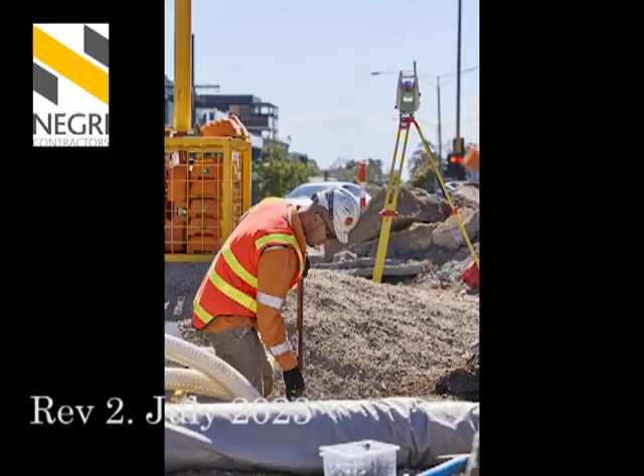I understand we've all done lots of inductions, but it's important that you listen because work processes change, and this might save your fingers, save an eye, save your job, or even save your life. So it goes for about 20 minutes and I encourage you to pay attention.

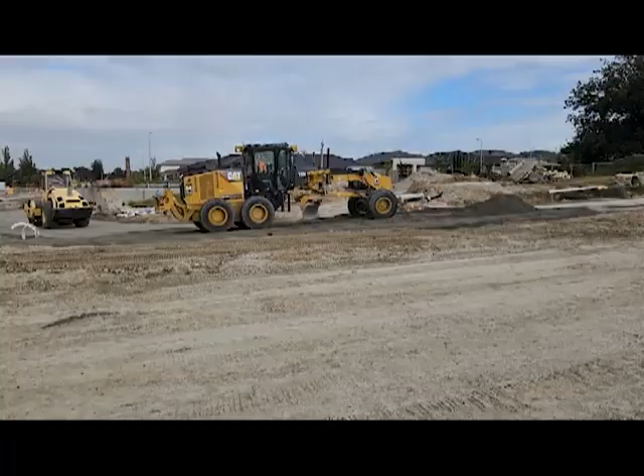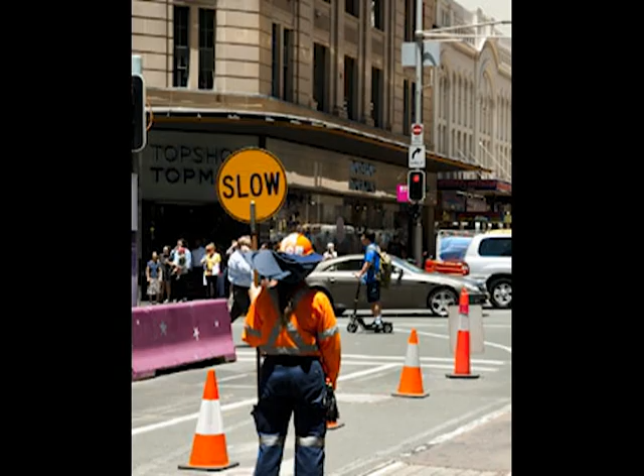So what's the reasoning behind delivering this induction? Negri offers an induction for several reasons. It's fundamentally important that everybody working on site understands what the safety, quality and environmental requirements are on the project they are working on, as well as the workplace expectations and what workplace behaviours are deemed acceptable. Those benchmarks include how we undertake all work safely, how we deliver work to a quality, and how we work collectively to deliver a project to a client's specifications.

This induction will outline a number of non-negotiable workplace conditions which all workers are required to apply at all times on any Negri project, in how they treat their fellow workers, apply safety to all tasks, and deliver work to an acceptable quality and on time.

The objectives are for workers to demonstrate an understanding of their workplace safety responsibilities and to work within the requirements that may present while on site. Workers also have to successfully answer a very short questionnaire at the end of this presentation to show that you understand your accountabilities and responsibilities, and finally to produce evidence on the devices having completed the induction when requested on site. Negri work under several key pieces of legislation, the main ones being the Victorian Occupational Health and Safety Act of 2004.

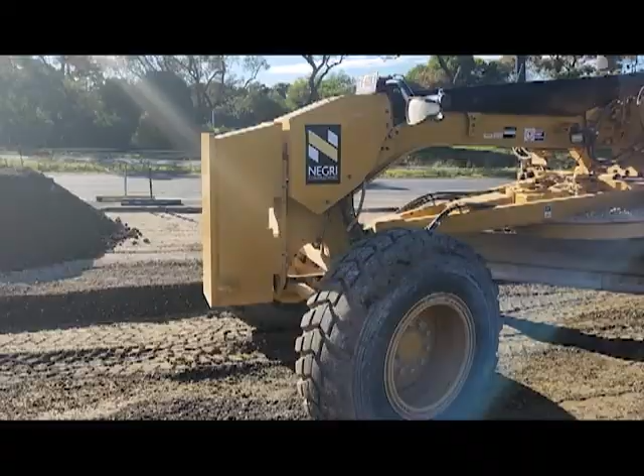And the Victorian Occupational Health and Safety Regulations 2017. There are a number of other acts and regulations, as well as compliance and guidance notes, codes of practice and Australian standards that Negri and the project work under. All legislation and compliance codes are available on site on request.

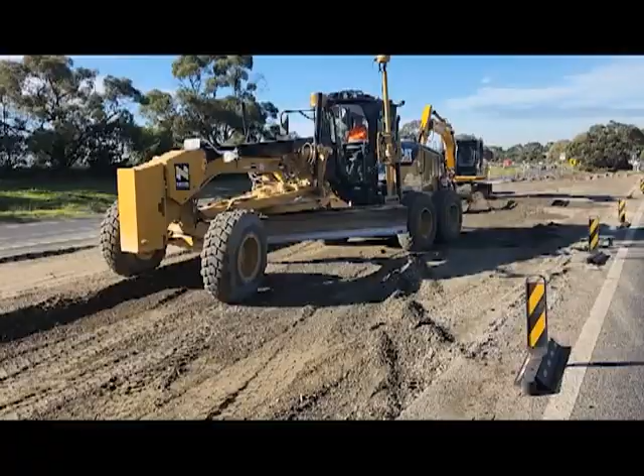A key element within the Victorian Occupational Health and Safety Act of 2004 is the notion of duty of care. This means that as an employer we have an obligation to our workers to provide a workplace that is free from any reasonably foreseeable risks.

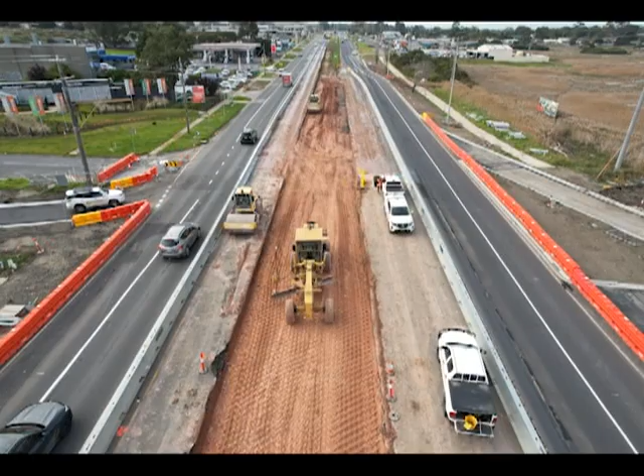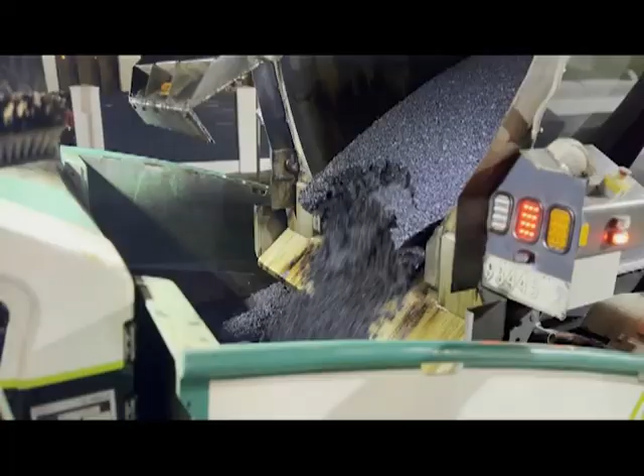Negri must meet our duty of care by providing, amongst other things, safe systems of work, ensuring that all plant and equipment is safe to use, ensuring that all reasonably foreseeable risks are identified, assessed and controlled, and providing training, instruction and supervision to ensure that all work being done can be done so in a safe manner. This induction forms part of that training requirement.

Under the Occupational Health and Safety Act, workers also have duty of care obligations. These are predominantly that you will undertake all reasonable actions to ensure your own safety as well as the safety of other workers, only work within your competencies and not do anything you're not trained or experienced in doing, follow all reasonable instructions as issued by Negri, and wear and use all PPE as intended and as directed.

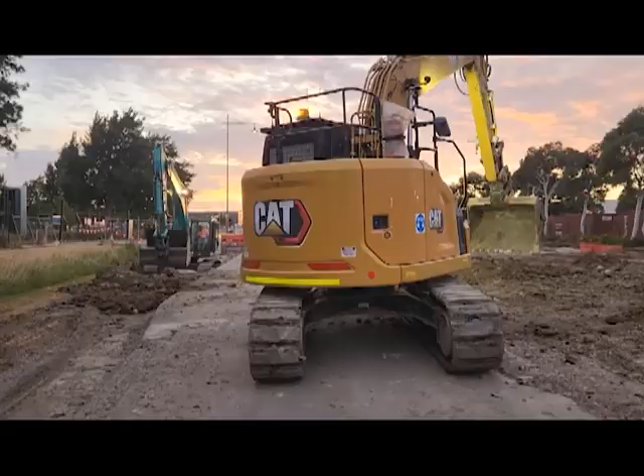If you feel what we ask of you during this induction you're unable to comply with, then please do the right thing and don't come to work with us, because we won't lessen our safety requirements for anyone.

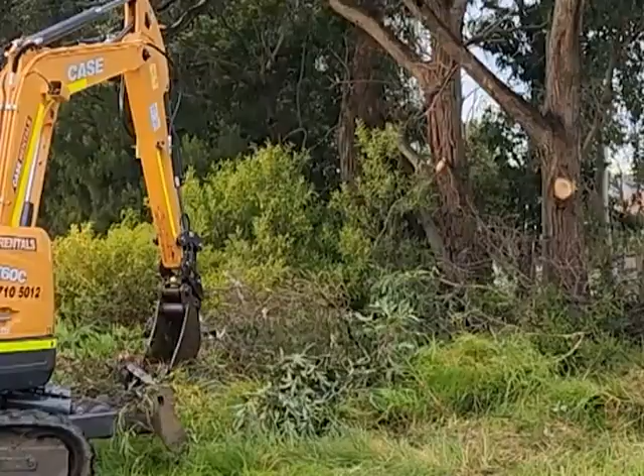So who is Negri? Negri is a proud civil construction company that is approaching 100 years of delivering construction projects in and around Melbourne. Negri started in 1928, and even though there's been a few changes, the core of the business remains the same. We'd like to believe that the longevity of the business is due to our reputation with clients, completing projects safely and on time, to a budget and to a very high quality standard that our clients are proud of what we deliver for them.

But Negri is more than just a business name. Negri is made up from all the people who turn up and work for the business in any capacity every day. And Negri is as successful as the least safe person on a site.

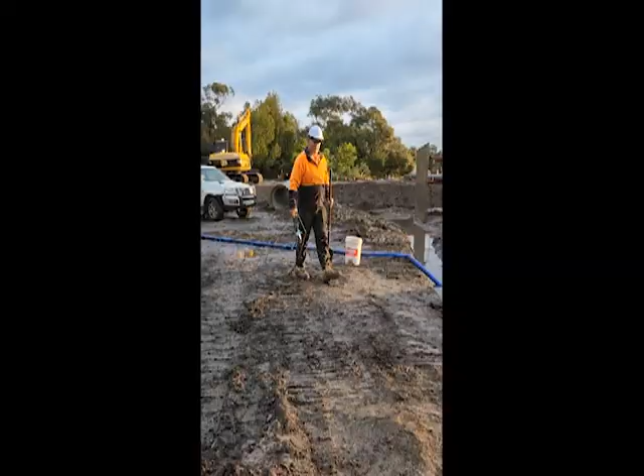Negri will only be as successful as the person working on site who cares the least about the quality of work they deliver.

Negri have a lot of workplace policies around safety, environmental, quality, bullying, fair work, issue resolution and a few others. These are displayed in the crib rooms at the project you're working at, and these policies reinforce those standards and expectations we're about to cover.

We're going to spend the next few minutes looking at some of the high risk work that affects most Negri projects.

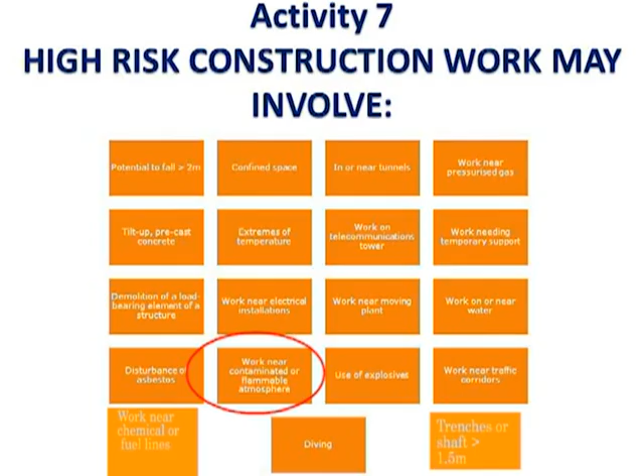The common high-risk construction work activities that generally happen on Negri sites involve the potential to fall greater than 2 metres, trenches or shafts deeper than 1.5 metres, confined spaces, work near pressurised gas, works near electrical installations, work near moving plant, the disturbance of asbestos, work near contaminated or flammable atmospheres, especially regarding silica dust, and work near active traffic corridors including rail and roads.

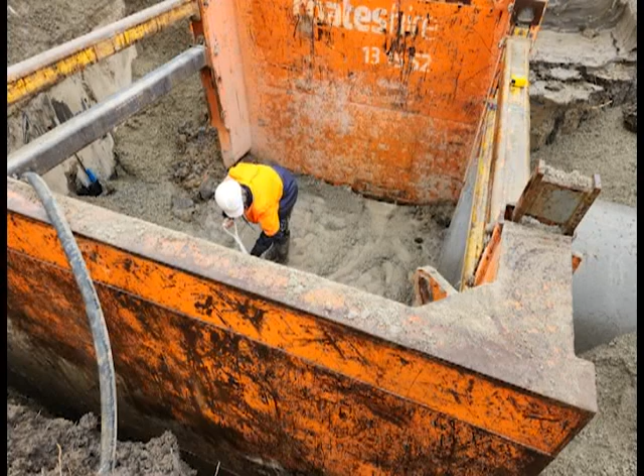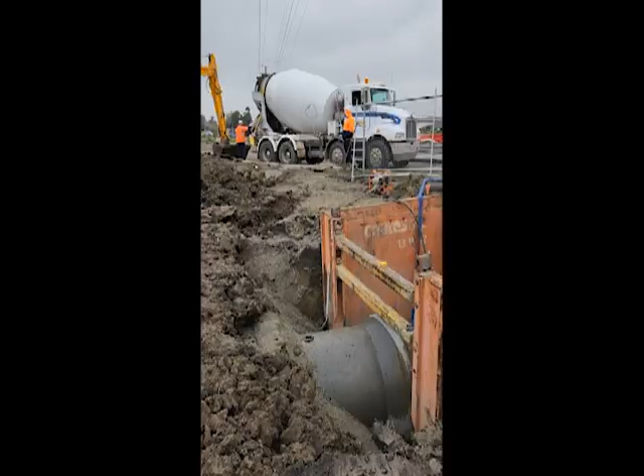It's important to realise that all high-risk work activities on a construction site must have a safe work method statement prepared for that task to work under. Safe work method statements must only capture any of the high-risk works as we've defined, and must then nominate what specific controls are to be applied to manage or mitigate the risks associated with those high risks under that construction work.

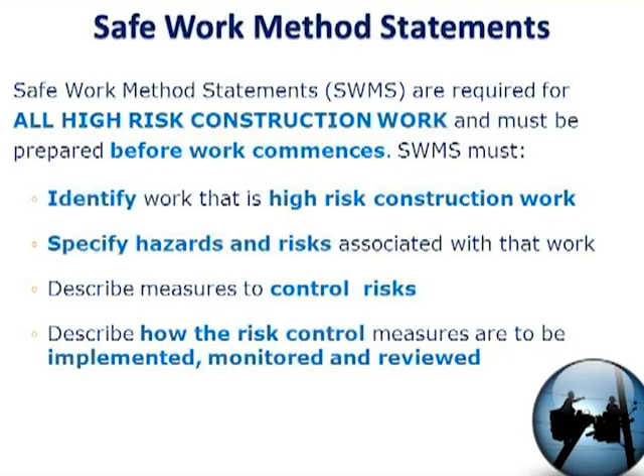SWMS must also determine who specifically is deemed responsible for ensuring that the nominated controls are in place prior to works commencing. For the SWMS to remain compliant, no other hazards or risks that are not defined as high-risk construction work are to be captured on the SWMS document.

Works should not commence until a safe work method statement has been developed and reviewed. For all other hazards and risks, these need to be managed through other means. Workers undertaking tasks under a SWMS must have an opportunity to read and review that SWMS prior to the works. All SWMS must be reviewed monthly as a minimum and re-signed, including all subcontractor SWMS.

Let's spend some time looking at some of the known high-risk work activities that we routinely are exposed to on our projects, and the steps we need to take to sufficiently manage the risks they bring.

By design, Negri is a civil construction company. A significant majority of our works involves construction of either new roads or replacing and resurfacing existing roads. As a result, we constantly find ourselves interacting with members of the public in vehicles as they transit through and around our work sites. The risks around having this shared workspace with members of the public that we do not directly control or manage introduces a number of critical risks in our workplace that can be difficult to apply.

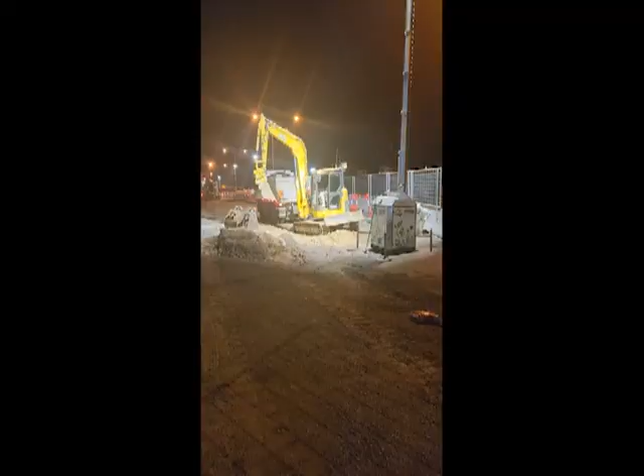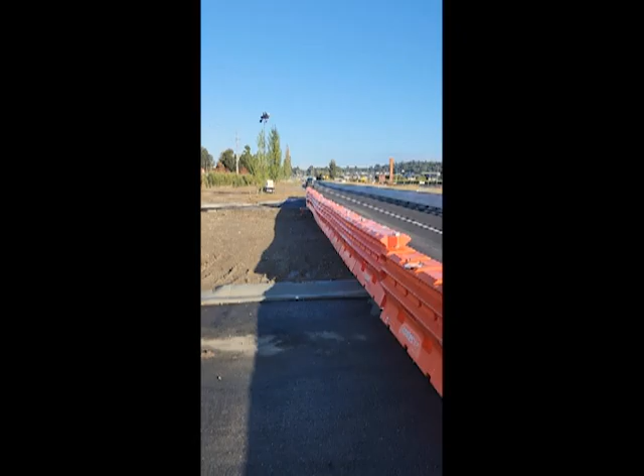To try and manage those risks, we look to separate or segregate our workplace from these members of public wherever practicable, using a number of delineators or barriers. From TL4 or TL3 type steel and concrete barriers to TL2 type water barriers, or in some instances, bollards and stop-go traffic controllers in parallel with truck-mounted attenuators. Each workplace risk will need to be managed by using the most practicable control.

When working within these workspaces, workers must always maintain a high degree of vigilance around what members of the public may be doing.

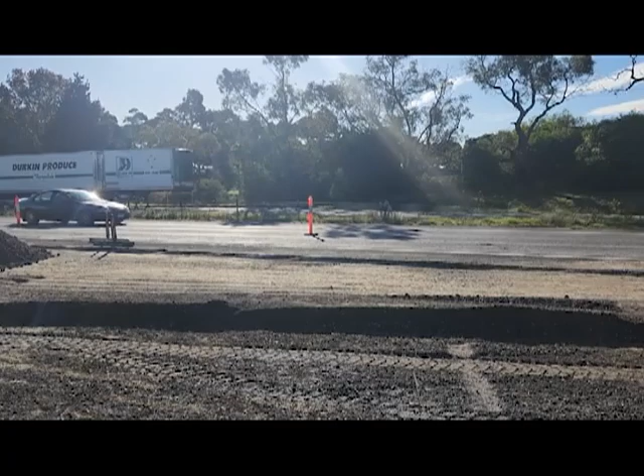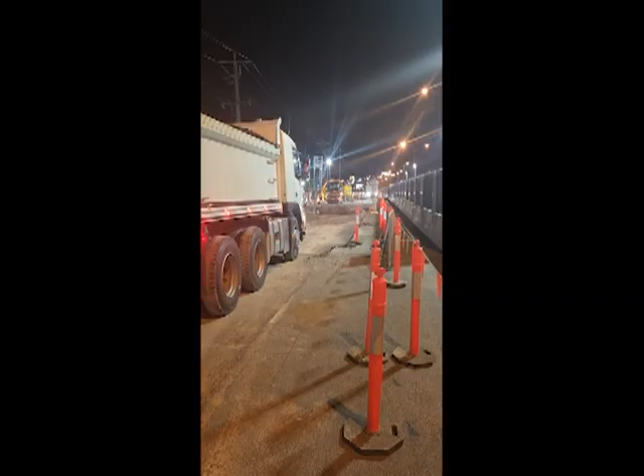Where the barriers are installed, workers are not to work within any defined deflection zones. Deflection zones are dictated by the speed of the traffic passing the barriers and the types of barriers in use. Deflection zones will be discussed in pre-starts and should be marked when on site. No tools or materials are permitted to be placed or stored inside this deflection area, and nothing is to be leant up against the barriers.

Under no circumstances are workers permitted to ever jump over traffic barriers. Proper pedestrian access points to allow workers to safely cross any active traffic lanes are to be designated within the work zones, and it is that point only where workers will cross roads to enter the work site.

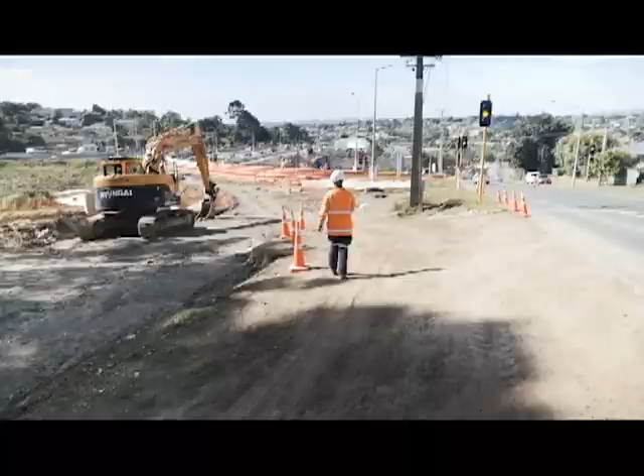On some occasions, our work involves entering into confined spaces, and there are a number of requirements around what needs to be done prior to that work being attempted.

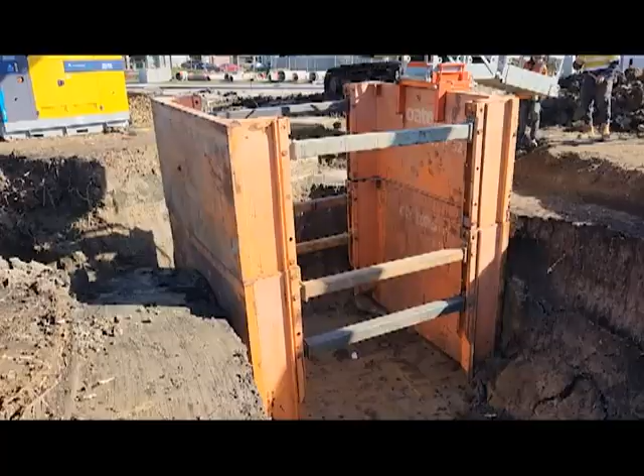On all projects, Negri will ensure that all confined spaces are identified early, as that will trigger certain safety requirements for works to be done safely, such as all workers entering the confined space must be able to demonstrate they are familiar with the hazards and risks that working in that confined space may introduce.

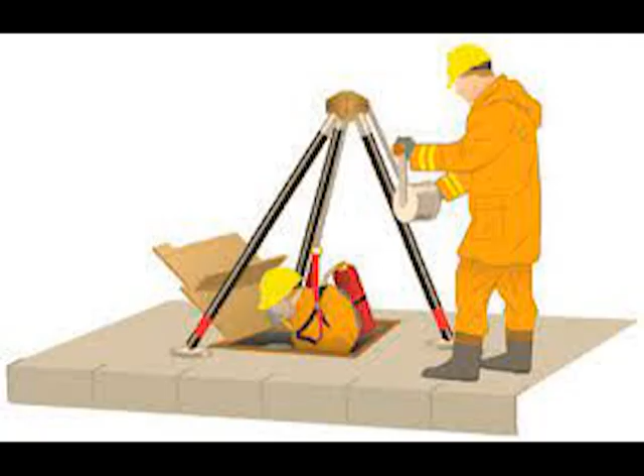There must be a permit to work system in place where all workers entering that confined space must sign in and out of, and there must be a dedicated confined space sentry who is able to maintain continuous communication with the people working in the confined space and who oversees the safety of those people.

No worker is to be requested or is to work in a confined space where those conditions are not met, and where there is any doubt, workers are to follow the Negri issue resolution procedure before that work is started.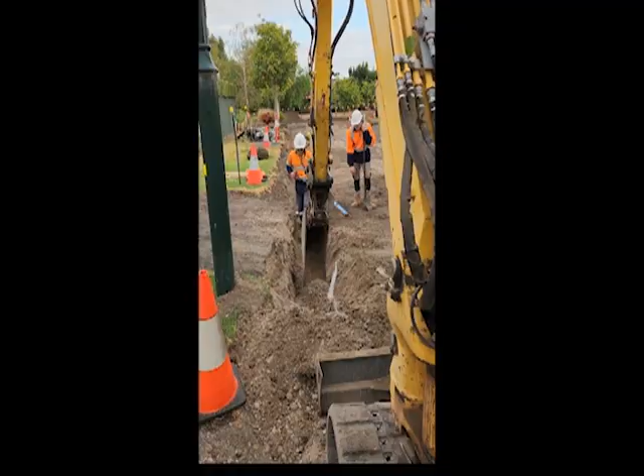Possibly one of the biggest risks for any civil construction company, especially during excavation activities, is contacting an underground service that is either unknown, hidden, or missed during any utility mapping. These can include high pressure gas lines, high voltage electrical lines, drainage and sewage pipes, and a number of other services people have buried over time.

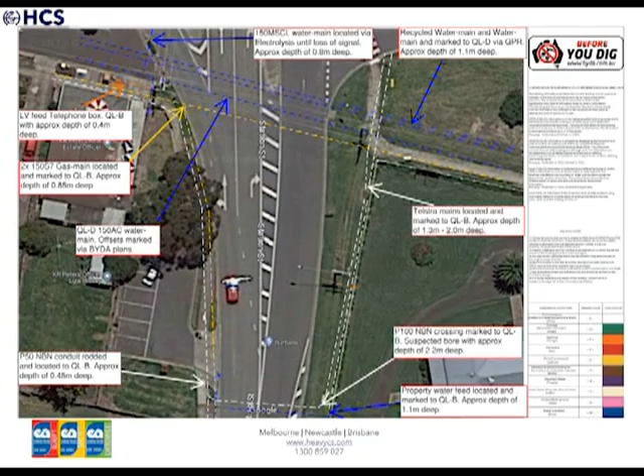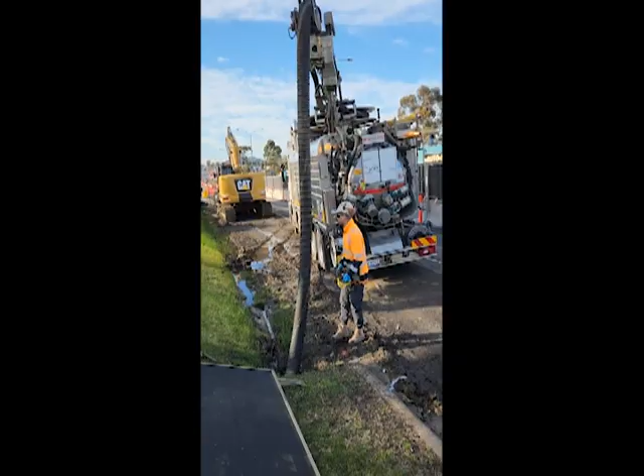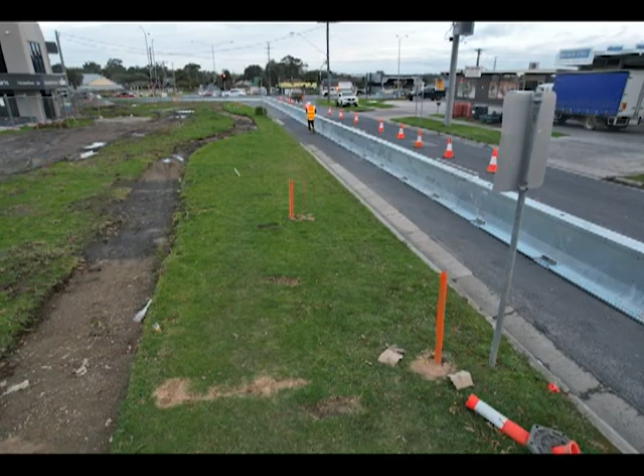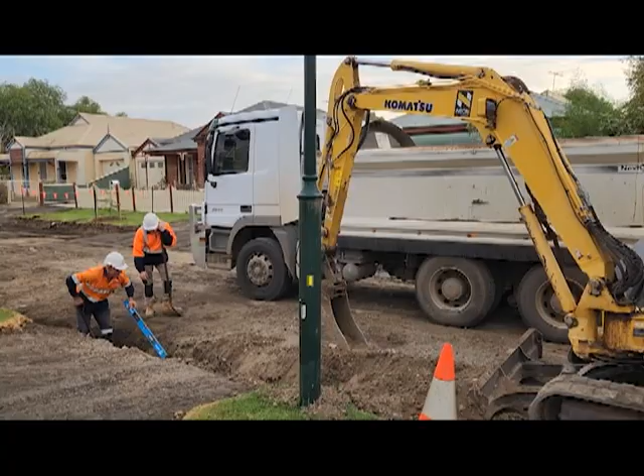On all projects, Negri will review all dial before you dig documents, as well as liaise with utility owners, and then physically locate any services that run into, through, or out of our working areas, using either non-destructive digging or service sweeping. The other risk for workers and plant is contacting overhead services, mainly communications cables or electrical wires. To best mitigate those risks, safety controls will be put in place, from proximity warning devices through to ticketed and experienced spotters being used whenever Negri is digging, or wherever we are using plant or equipment that can access inside overhead no-go zones, or where there is any risk that both may be present.

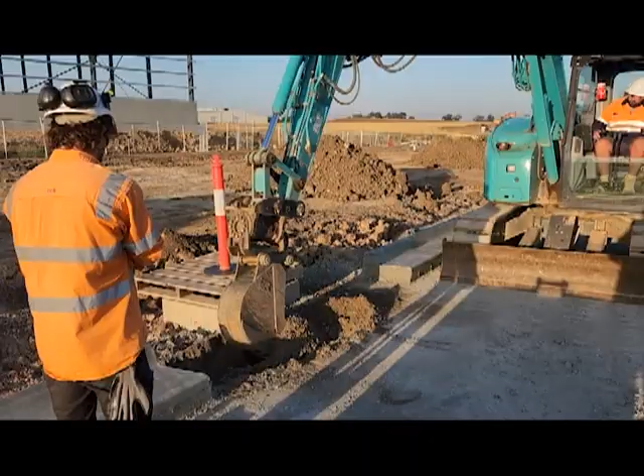Nearly every Negri project encounters the need to trench to a depth deeper than 1.5 metres. Trenches that deep introduce risks around potential for collapse, the potential for oxygen deficiency, and the potential for flammable vapours and gases that are heavier than air to accumulate.

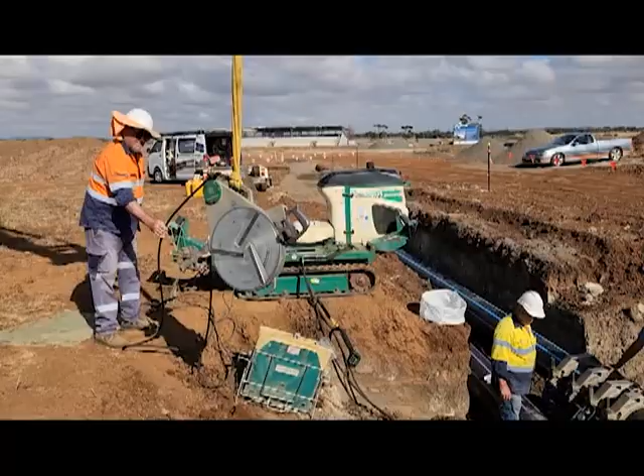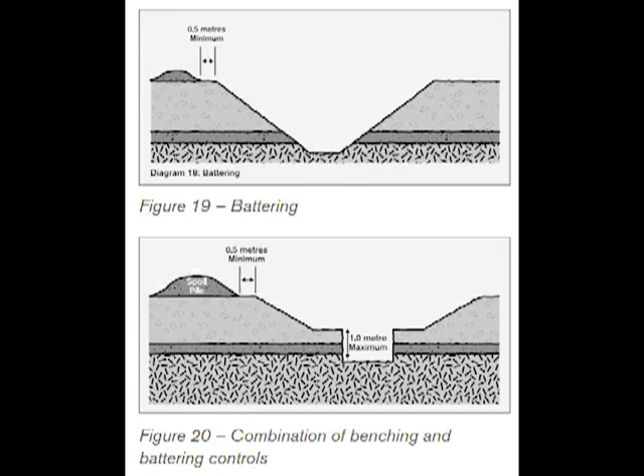To manage those risks, any excavation with a vertical wall greater than 1 metre in height must either be benched, be battered, have a geotechnical engineer confirm that the trench walls are able to sustain themselves without collapsing and that it's an acceptable risk, or shields and soldiers are to be used to secure all trench walls. The Negri project team will constantly reassess the works and put in place suitable controls where we are working in trenches deeper than 1 metre.

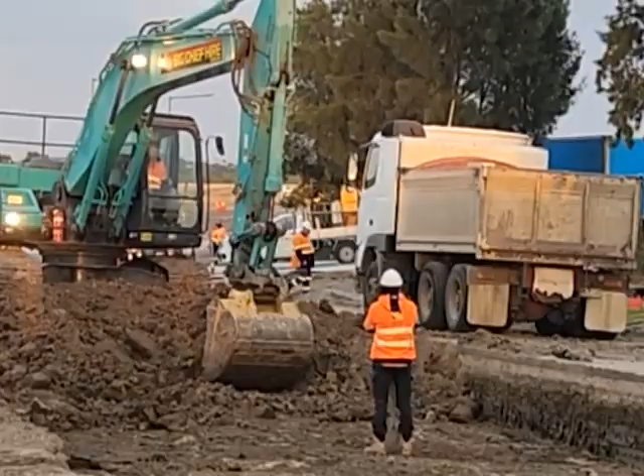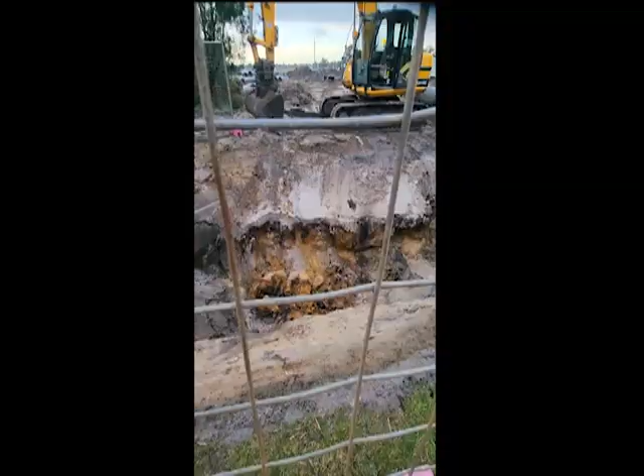To deliver on our works, generally we need to use big, cumbersome, heavy items of plant and vehicles that have very large blind spots. And while technology is improving to allow operators to be made aware by audible alarm when somebody enters within a no-go zone, there are still instances where machines are blind to worker movements.

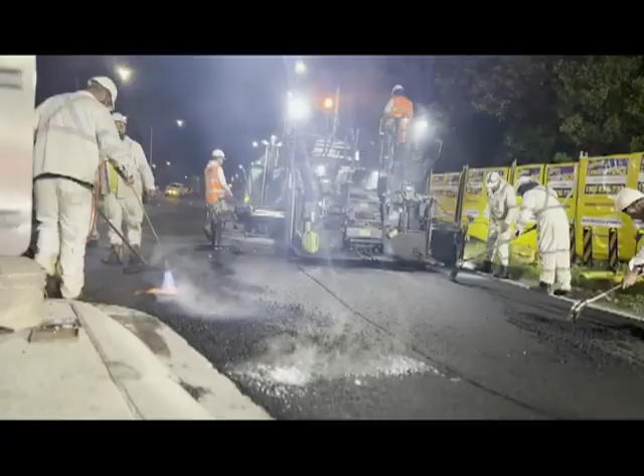All projects must ensure there are suitable pedestrian access points for workers to get around the work sites. Unless a person is working with an item of plant or a machine, no worker is permitted within 5 metres of that operating plant, unless the operator is contacted, made aware of their presence, gives permission, and the plant stops work. All light vehicles are to be parked a minimum of 20 metres away from any operating plant, and all required PPE, especially high-vis in good condition, is to be worn whenever workers are on the ground on a Negri project around operating plant.

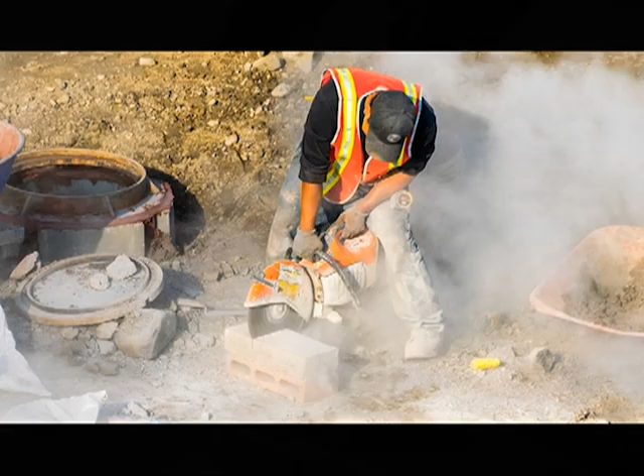Possibly one of the more prevalent risks nowadays within the works that we do is when working around and with concrete. It is now accepted that fine ground concrete powder and dust can cause significant chronic illnesses such as silicosis, and all efforts must be made to prevent or reduce dust from being produced.

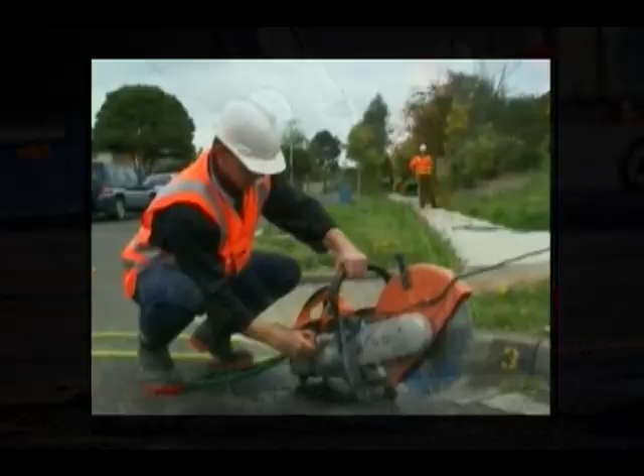From concrete dust produced when bags are placed into concrete mixers, to using any type of cutting or grinding equipment on any product containing concrete or cement, and when cutting asphalt or concrete products. As a minimum, when extraction ventilation to remove dust isn't practicable, dust must be suppressed by using water. Any worker within that area must be provided and wear a P2 dust mask at a minimum.

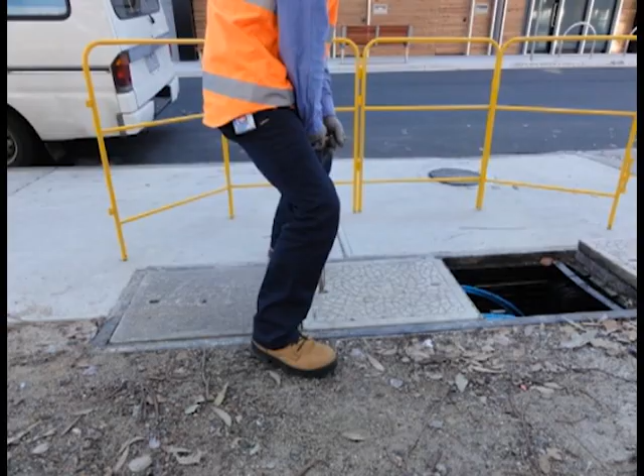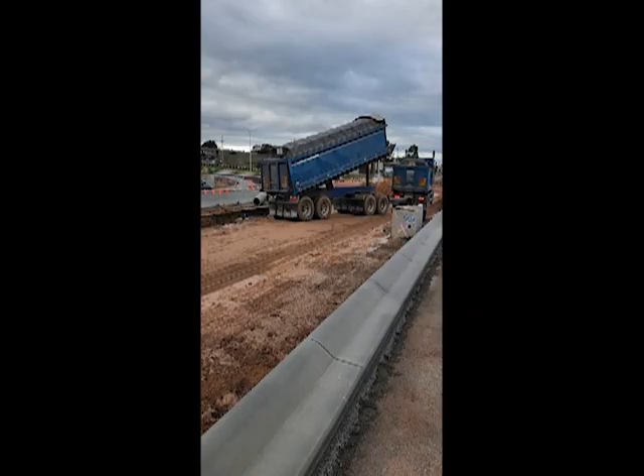So what about all the other hazards and risks? There's still a requirement to capture those, as they may still impact how work can be completed safely. Those risks that sit outside of construction activities deemed high risk can be managed through something like a job hazard analysis, take fives, stops, or pre-task meetings to discuss how the works are to be done. We need to make sure that we are still aware of all the risks and hazards our workplace has.

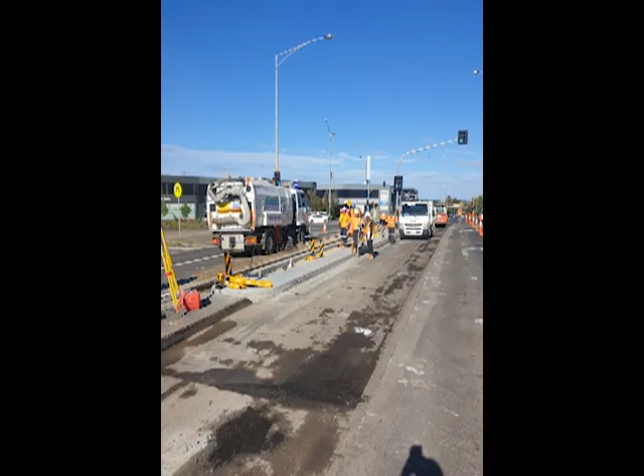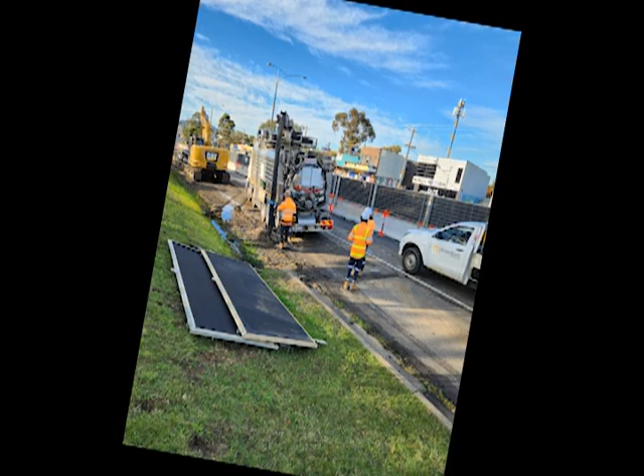All projects will have PPE requirements that we will discuss further. PPE is the least preferred method of controlling those hazards and risks and trying to protect workers. For PPE to be effective, it must be worn correctly, and it must be worn as intended. Any workers found not wearing the correct PPE for that work will be asked why. Negri have minimum requirements on all jobs when wearing PPE.

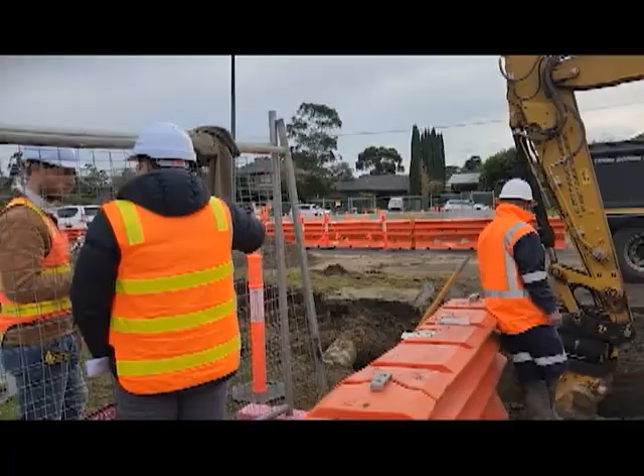The project is a hard hat site, and hard hats must be worn at all times where they can be. You must be able to clearly demonstrate in a risk assessment where they're unable to be worn and what other controls would be put in place.

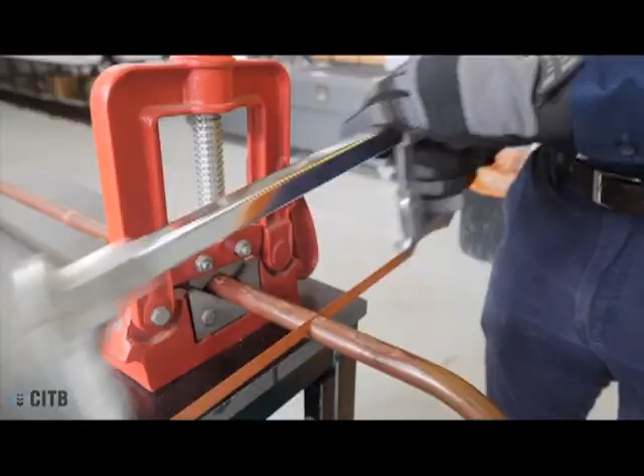Safety glasses must be worn while working on site, and compliant VicRoads high-vis clothing is also to be worn while working on site. Gloves need to be worn whenever material handling or using certain hand tools, or as outlined under a risk assessment, as wearing gloves will significantly reduce the risk of workers sustaining serious hand injuries.

All workers must wear long sleeve shirts, button down, and long pants at all times to protect against UV as well as scratches and knocks. Tracksuit pants are not acceptable as they don't provide the same level of protection. All workers must wear steel cap lace-up boots, again unless it can be demonstrated why they cannot or should not be worn.

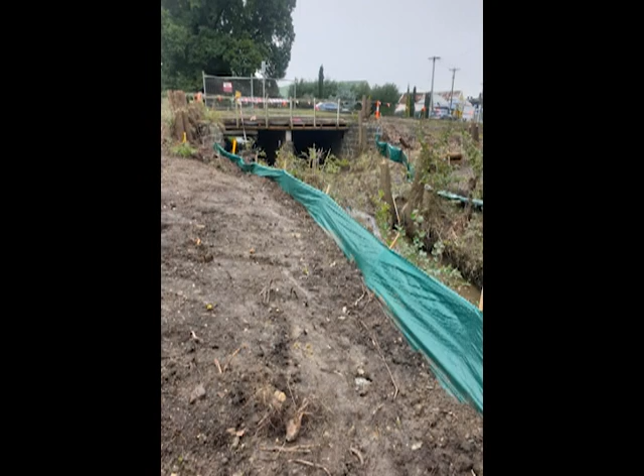We need to be mindful that hazards and risks can be found in the various stages of the work that we do. There are some hazards that are obvious. There are hazards that are hidden that don't present as a risk until we commence work. And there's hazards that are developing as we continue on with our work.

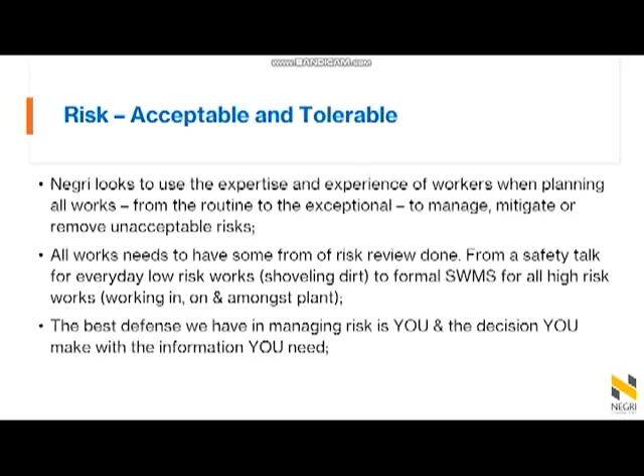While certain risks in our work cannot be entertained, we do accept that in the work we do, there are still risks each day we must face. We will look to utilise the skills and experience of our workers so that we understand those risks and have those risks reduced to a level where we all feel it is acceptable.

All works on a Negri site need to have some form of written risk assessment undertaken. Negri believe your best protection from hazards and risks is you making smart decisions, utilising your skills and applying your experience to make safer decisions first on all jobs you are doing, or asking any questions where there are gaps in that knowledge or experience.

Most industries assess risk controls against a process that's called the hierarchy of control. We use this process to better ensure that risks are assessed in a formal manner and then apply controls that get risks down to an acceptable level.

So bringing all those risk management programs together is a process called the HIRAC principle, which stands for Hazard Identification, Risk Assessment and Control. Because we need to try and identify those hazards on our sites so that workers are able to determine just what risks are likely to be encountered, and then what problems those risks may introduce.

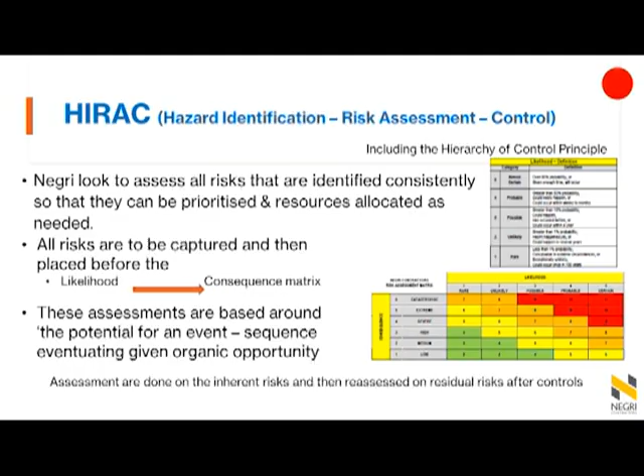We use a standardised risk assessment process which will allow workers to prioritise those risks, that if when encountered will either carry a very high likelihood or a high consequence, and we do this by using the risk score matrix. When this matrix is used, those risk assessments are to be documented.

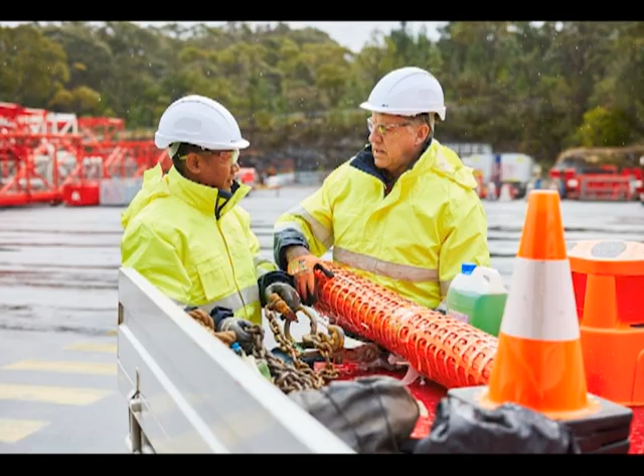We will now look at a number of what we call absolutes that exist within the civil construction industry that Negri apply. All persons working on a Negri site must have undertaken some form of a Negri induction, attend the project's daily pre-start meeting, have a construction white card if doing construction work, report any and all incidents and hazards to a Negri manager, and immediately stop a worker that is working in a manner where they could hurt themselves or hurt others, amongst other absolutes.

As all workplaces do, we hold a number of expectations for our workers on sites. All violations and breaches of our workplace expectations will be met with some form of disciplinary action.

Some of the expectations that we have that may result in disciplinary action are any fighting on site, stealing of any property from either a fellow worker, a client, or from Negri, any sexual harassment or racial vilification. Using Negri's provided hardware such as laptops or tablets inappropriately to download sexually explicit material. Or attending work under the influence of any drugs or alcohol. Or anything else that goes against a reasonably held standard for a modern workplace.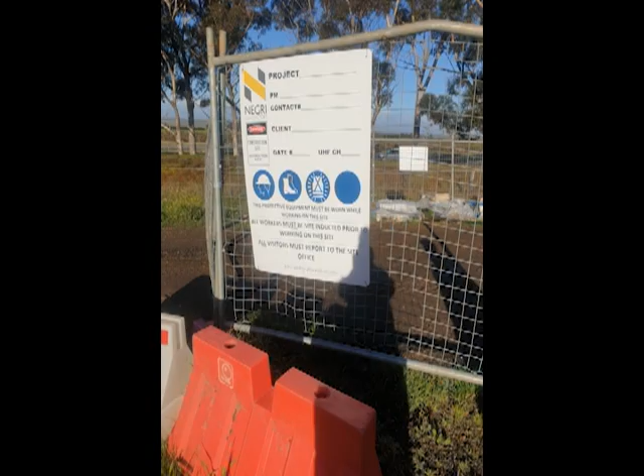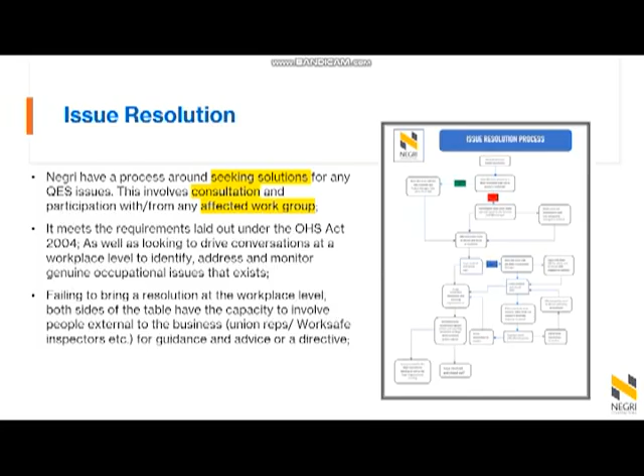Negri have a simple issue resolution process. This reflects what is required under the Victorian Occupational Health and Safety Act. For any safety issues, Negri will engage with workers to look for resolutions. Or as a last resort, a WorkSafe officer may make a decision or give a direction on the best means to manage that safety issue. The issue resolution process is displayed at all Negri workplaces.

I first became involved with R U OK when I went through my own challenges. I was on Struggle Street back in 2012, and I had a mate actually call me out on the stuff he was noticing, the changes in my life. That conversation led me to get the help that I needed, and the reason why I'm here today.

One of the things that I wish I'd known earlier on in regards to mental health and being a tradie was that it's okay not to be okay, because sometimes life happens.

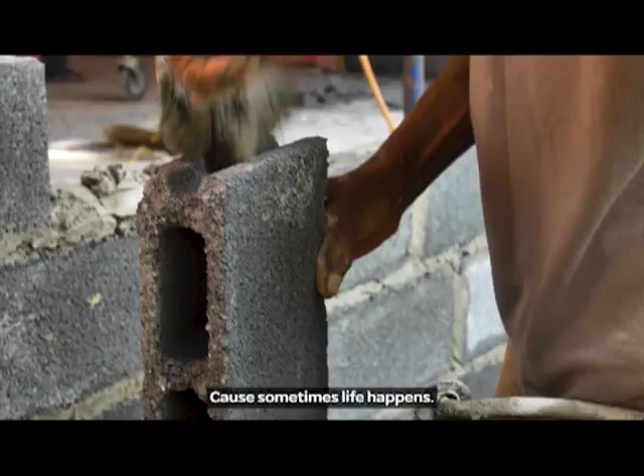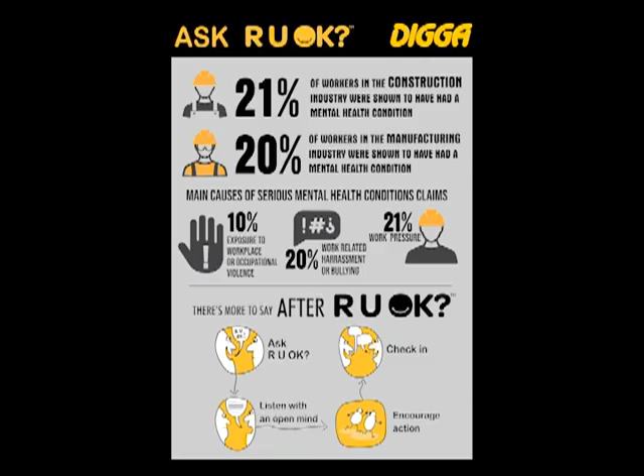Mental health and well-being: the project is looking for all workers to manage their own well-being, and especially their fatigue management while working on the project. The project will experience a number of flexible shifts, both night works and day works, where worker well-being must be suitably managed. The project is also asking workers to ensure their workmates come to work in a fit and mentally proper state, or to raise any safety concerns with their supervisor to ensure that all workers present on site are safe to work.

Inclusiveness and social procurement. All workers on Negri's projects rightly expect a workplace that is free from any form of harassment or bullying based on who that person is. Negri holds as an absolute that all workers are to be treated with respect and entitled to attend work to do their jobs without the threat of bullying, harassment and intimidation for any reason, especially where a person may be discriminated or picked on due to their sex, social standing, marital status, religion or their gender identity. Where this is established as occurring, those responsible risk disciplinary action up to being terminated from employment or being removed from a Negri site.

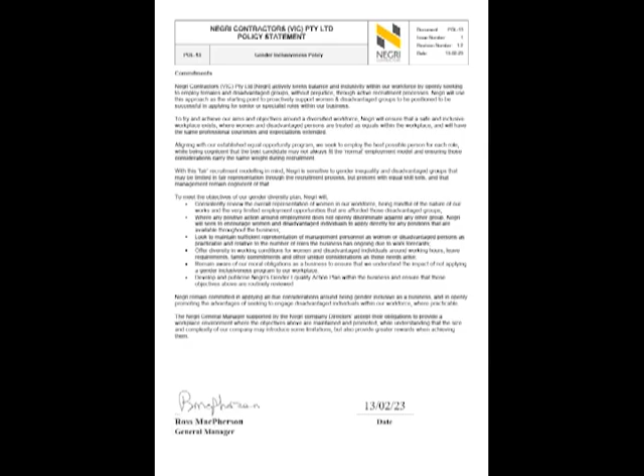Negri is a signatory and committed to the Victorian State Government's Gender Equality Action Plan, and we seek to increase the safe and meaningful participation of women in senior positions throughout the project's life cycle, wherever possible.

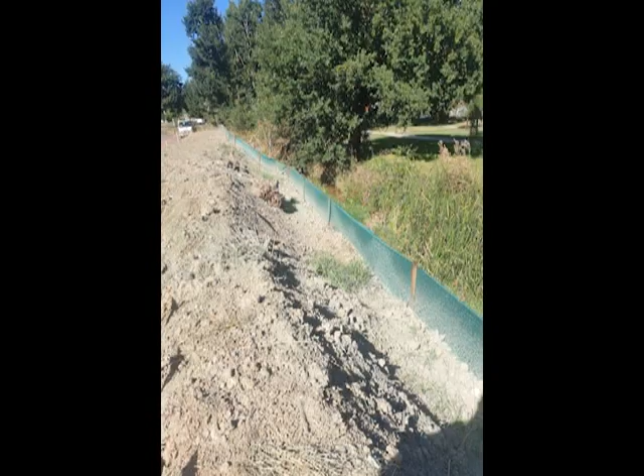Environmental: Negri is committed to providing as much protection to our workplace environmentally as possible. No dirty water is to be discharged from the site without first being treated and tested to ensure it will not cause any issues when it enters drains or other water courses. All drains are to be adequately protected from silt and sediment entering stormwater drains unchecked. This may be achieved using silt fencing, drain pads or coir logs, or sediment tanks, or a combination of all of these. After major rain events, the site is to be inspected by Negri supervision to ensure that all environmental controls remain intact.

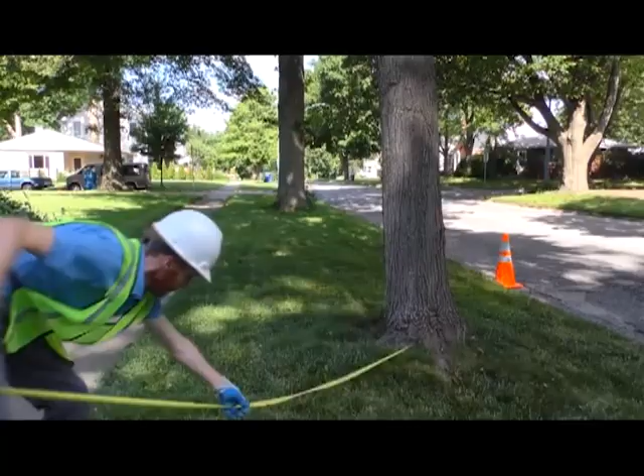Trees within the construction zone that are not to be removed are required to have tree protection zones installed and be clearly identifiable. Tree protection zones must be in line with the specifications outlined in the Environmental Management Plan. Tree protection zones are no-go zones under all circumstances, and permission from the Negri supervisor must be received before any works inside those tree protection zones are done.

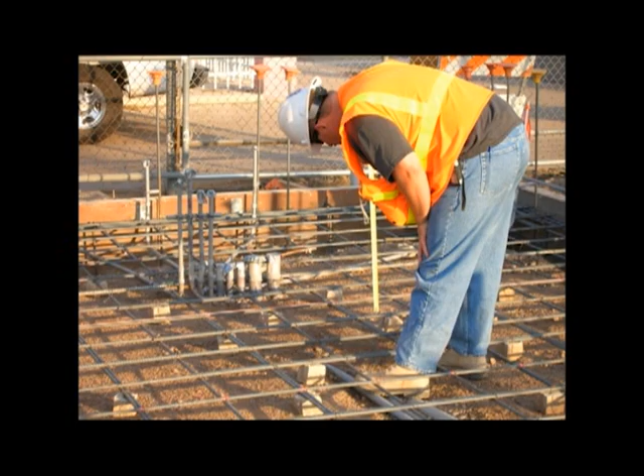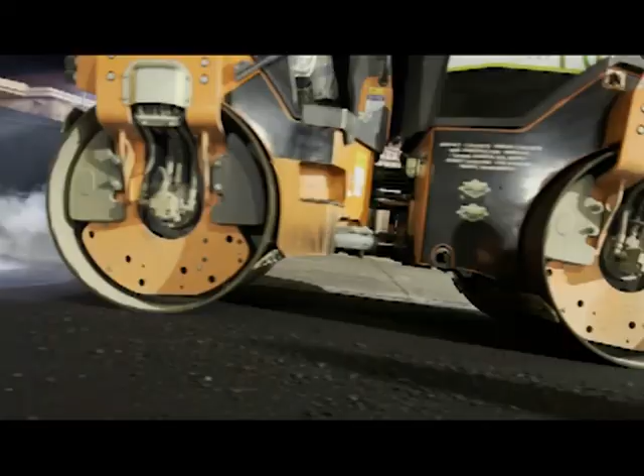Negri holds ISO 9001 quality accreditation. This should allow us to build the project to at least a minimum quality, with a number of requirements throughout the project's life cycle that are required to be met. These are captured on ITPs, FICs and as-builts, which are generally done by site engineers or specialists. But it relies on all of us having a level of pride in what we build when given the correct materials and tools, as well as notifying management when something either looks wrong or may have gone wrong. The quality of what we leave is a legacy to who we are.

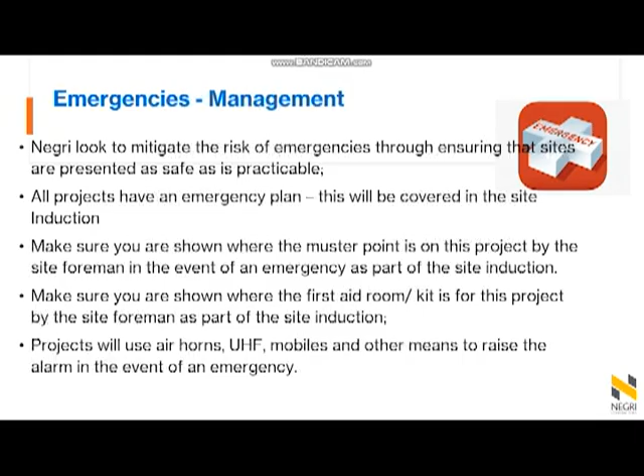We always look to set up our projects to go right, but what happens in the event something goes very wrong? More often than not, it's not a workplace incident that triggers a major response. In the event there is a significant incident that requires the site to be evacuated, we will be using UHF, air horns and mobile phones to raise the alarm amongst workers. The project will have a Negri nominated emergency controller and Negri nominated emergency warden, who will manage the incident from a communications and response point of view. Workers are to make safe any equipment where able to do so and make their way to the primary muster point located at the site compound.

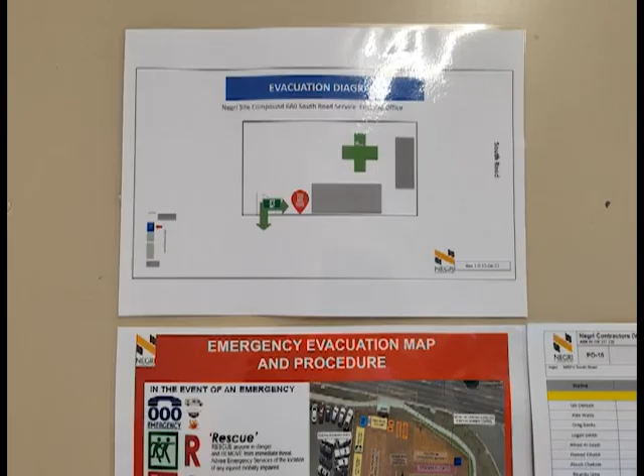Please answer a small questionnaire around what we have discussed throughout this induction. A pass score of 80% is required to deem that you are competent and safe to work on Negri projects.